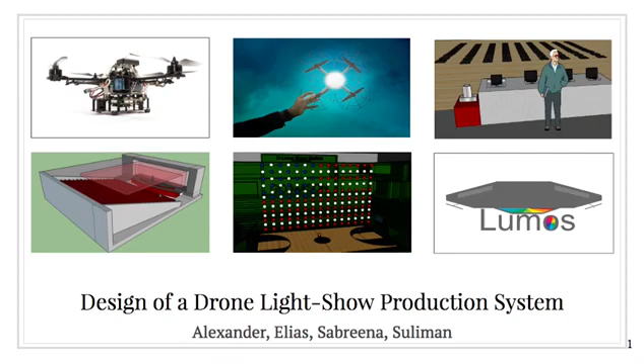A drone light show is a combination of several drones flying in unison, all while emitting different colored lights and flying in a variety of patterns in order to make a light show.

So to better understand a drone light show, we need to understand the industry behind it. In 2012, the entertainment industry had a $520.24 billion profit, representing about 29.2% of global revenue. That's huge. By the end of 2017, that number is projected to increase to about $655 billion, or about 29.4% of global revenue.

So this is a massive market, and we believe that adding variety to it would attract more demand to the industry. We also need to understand that there are different types of light shows and the context behind them. So we're focusing on fireworks and laser light shows.

For fireworks, in 2010 there was a consumer revenue of about $636 million, and that number increased to $755 million in 2015. Now, the trade-off here is that fireworks were the fourth largest cause of annual injuries in 2015, with 12,000 injuries.

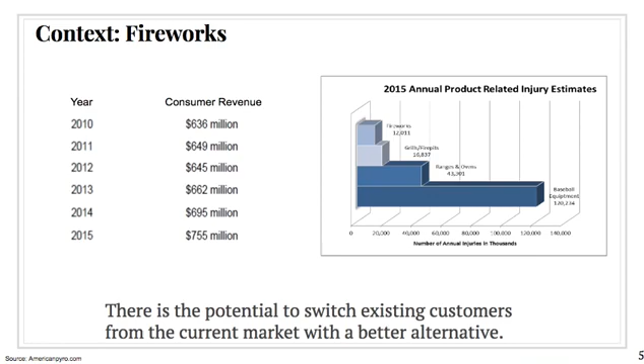We do believe there's potential to switch existing market customers to a better alternative. For our project, we specifically believe that outdoor projects become much more complicated due to a variety of hazards that come with nature. Storms, wind, and other unforeseen circumstances could hinder the safety of the project, so we're limiting our scope to indoors.

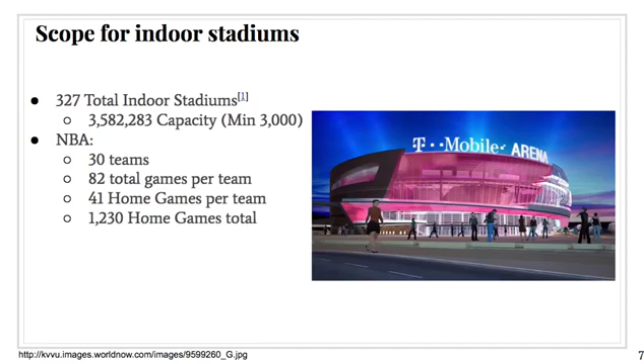For indoor stadiums, there's still a massive market - there are 327 total indoor stadiums, providing a massive seating capacity. If we look at the NBA, for instance, there's about 30 teams with about 41 home games per team, giving about 1,200 home games total. We'll go over this later, but that's a huge market to go into.

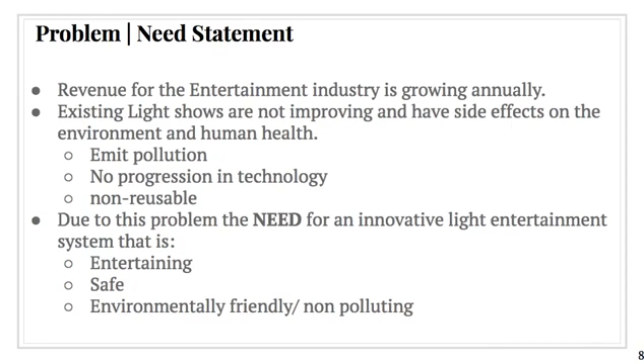For the problem need statement: the revenue for the entertainment industry is growing annually, but existing light shows are not improving - they emit pollution, they're not progressive in technology, and they're not reusable. Due to this problem, there's a need for a new light show system that's entertaining, safe, and environmentally friendly.

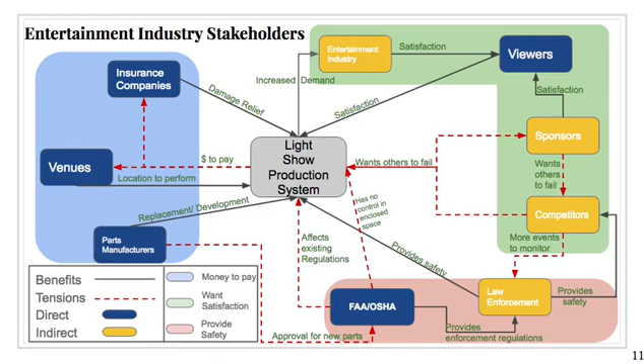For the stakeholders, we have 5 main direct stakeholders and 4 indirect stakeholders, representing the interaction between both. It's also important to note that no stakeholders are blocking our show from happening, regardless of the tensions shown, and that's really significant - it allows us to continue our project.

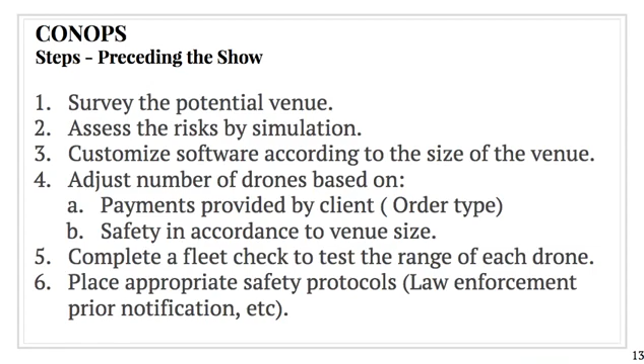Now onto the concept of operations. Preceding the show, the main focus will be venue assessment for risks and other parameters to enable customization of the show, including preliminary testing and ensuring the venue meets legal requirements. Those are our first main 6 steps.

On the day of the show, operations will focus on the preparation of drones and the entire system to ensure the performance runs smoothly. This includes setting up the communication system and having all the indoor requirements set as well.

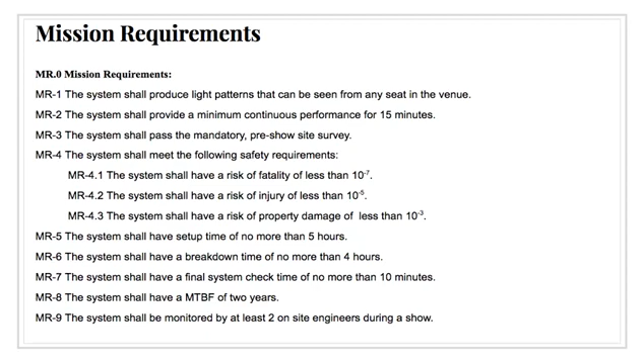Our mission requirements were created primarily with safety in mind. We also had a variety of different requirements such as simulation requirements, design requirements, and others to ensure that our system is fully functional and meets all the standards needed to make this happen.

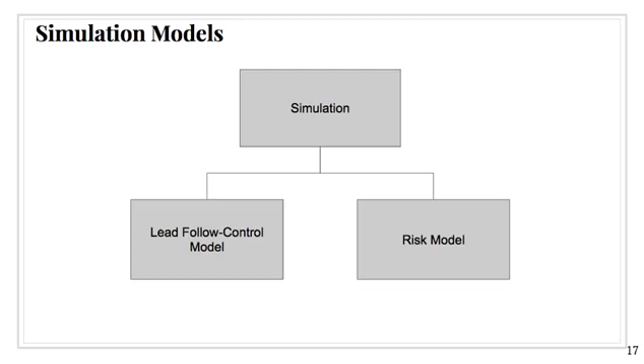One of the most important aspects of our project was the simulation to ensure safety. Our simulation models were divided into 2 main sections: the lead-follow control model and the risk model. Our lead model was developed to evaluate the relative trajectory of a lead-follow pair, and we used PID tuning in order to minimize any separation errors based on the target values.

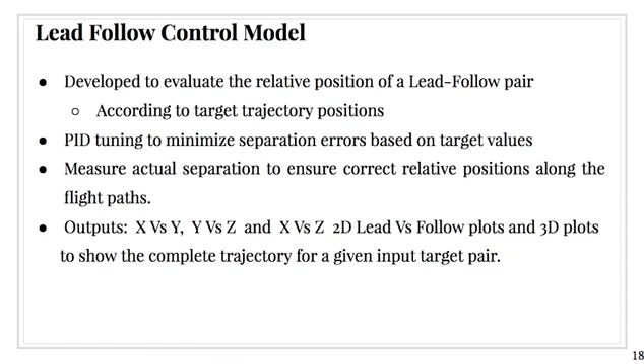We also measured actual separation to ensure the correct relative positions along with the flight paths, and this gave us a variety of outputs. This is basically the chart that shows our control process.

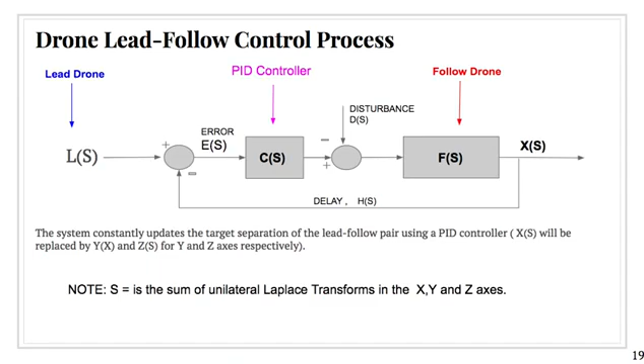As you can see, there's a lead input for the drones, which then leads us to the PID controller, and as an output we're given the follow drone. This has a small delay, but the system constantly updates the target separation, and as a result the PID varies.

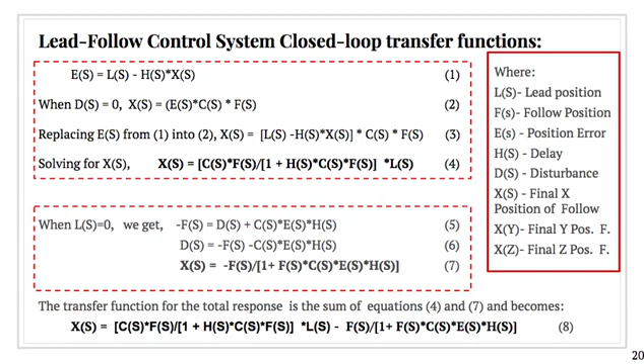The lead-follow transfer functions were derived in order to take into account any potential position error, delay, and disturbance for the system. The top box basically shows the final positions without disturbance, whereas the bottom includes disturbance.

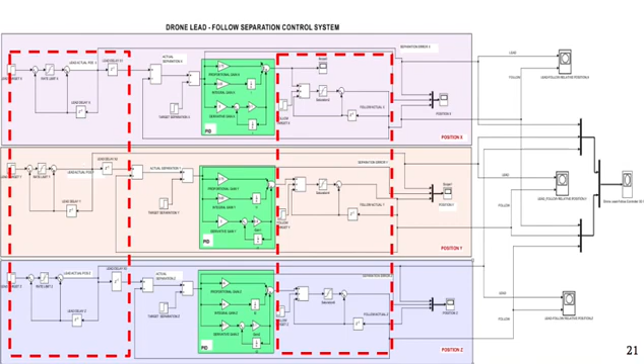As a result, we were given different scopes which provide different outputs to see any changes that we need to make for our system. We use system verification by simulation for the PID controller itself to test our model, and this was divided into the proportional, integral, and derivative controls.

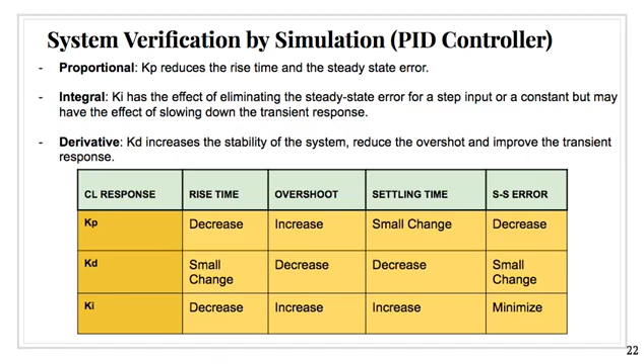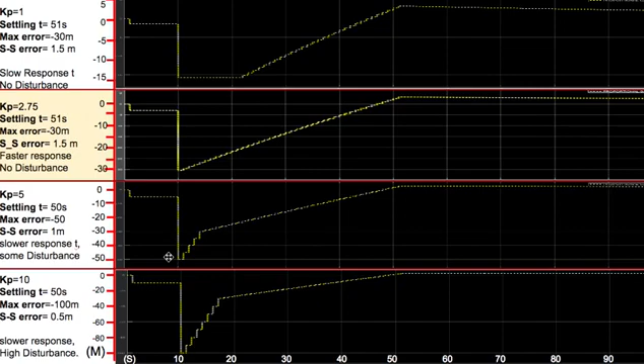You can see that primarily with this small increase right here, there is no delay, whereas KP of 1 has this immediate almost 10-second delay, where the system basically can do nothing. Now the bottom two values show disturbance in the step functions, as you can see right here.

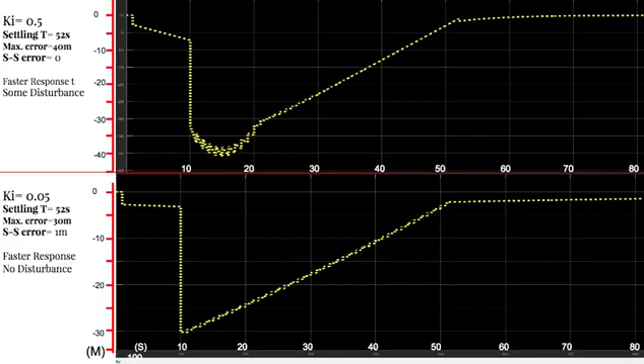KI was similar. We have two main charts, and you can see here as well that the disturbance is quite noticeable for a KI value of 0.5, whereas 0.05 immediately shoots up. This shows that there's a faster response, and that's why KI of 0.05 would be better.

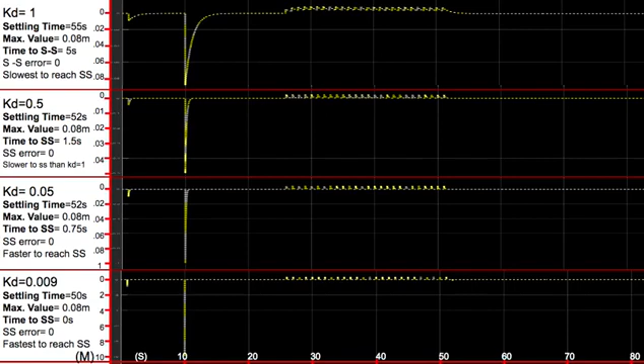Once again for KD, we can see the same thing: the smaller the value, the faster it would reach steady state, and the error is also 0 for steady state error.

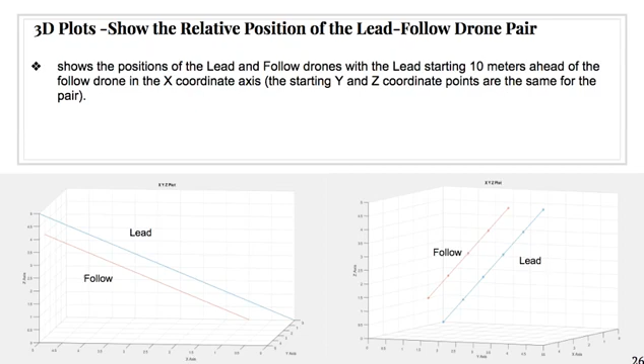Onto the risk model. The risk model is divided into two main sections. We first focus on the kinetic energy model, which focuses on the velocity and the surroundings of the drone itself, and we go into the fatality, injury, and property damage for drones.

Then the second risk model calculates the near mid-air collisions and the mid-air collisions for the drones, which also focuses on the drone itself but not the environment around it, and this also focuses on the drone velocities too.

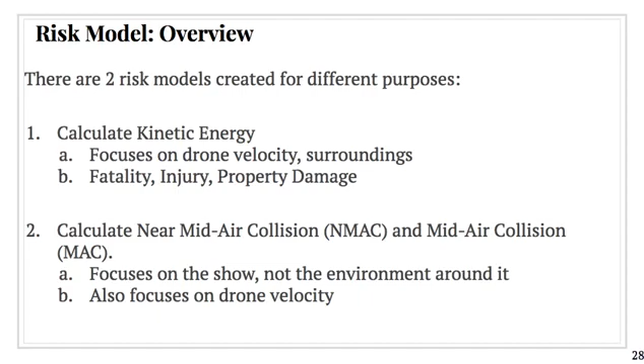This chart on the right basically shows the velocity to kinetic energy, and it's not specific to our system, but it is actually completely relevant. It's a study conducted by Monash University in 2013, and it shows us the acceptable velocity region.

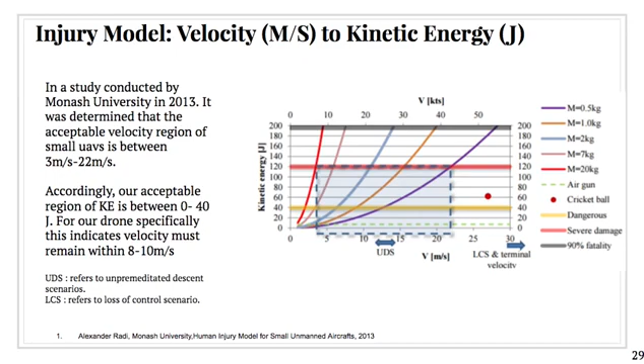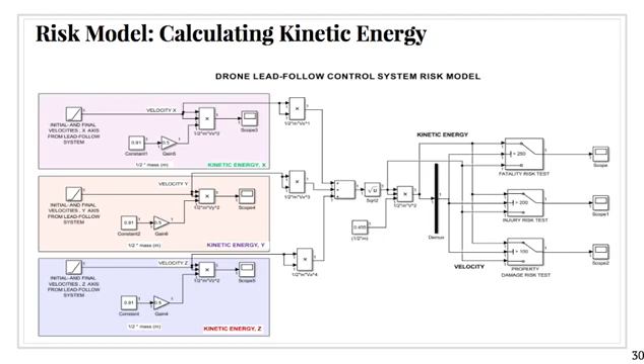So basically we were able to use our drone in our risk model to evaluate the specific fatality, injury, and property damage risks associated, and we can see that with slide 30, which is the risk model that we created. It basically uses the different inputs of the Asctec Hummingbird drone in order to see what outputs would happen, and see if the specific joule level would be high enough for a fatality to happen, an injury to happen, or any damage to property to occur.

Our output basically showed that for the Asctec Hummingbird, about 15 meters per second would be the max velocity to create a fatal injury risk.

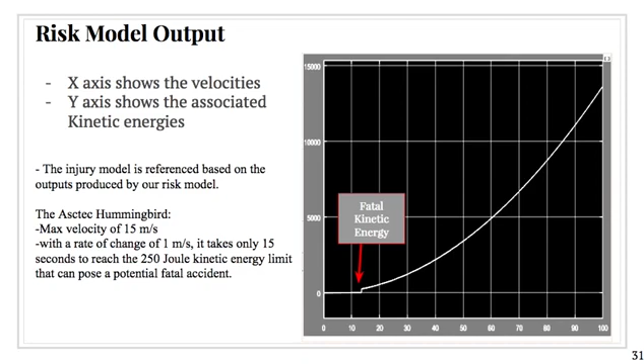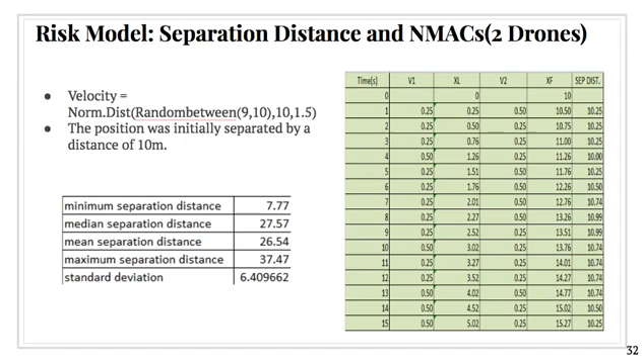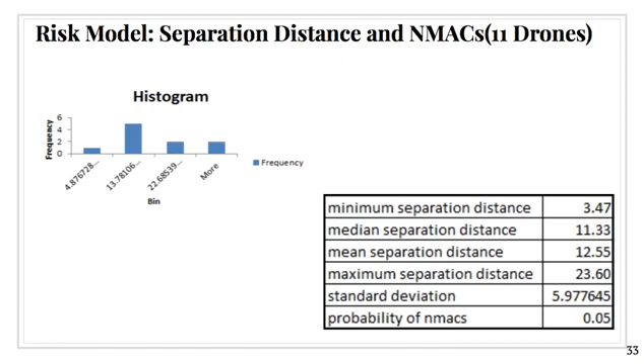Our mean separation distance here was about 12.55. We then lastly ran the risk model using 101 drones, and the mean separation distance remained around 13, which is very good.

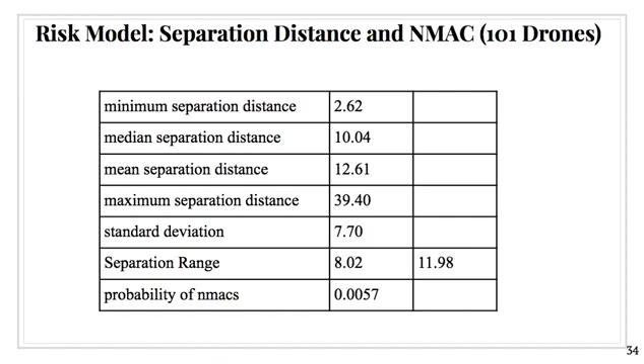Lastly, we had the business case, and the business case was very important for our project because we're in the entertainment industry. Without the business case, we'd have nothing.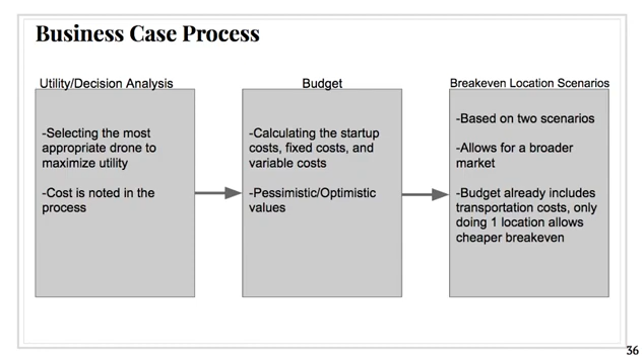The business case was divided into three main sections: the utility and decision analysis to pick the best drone, the budget, which is self-explanatory—calculating the startup costs, fixed costs, and variable costs—and lastly, the break-even location scenarios to show that our product has a broad market and anything is possible for different scenarios.

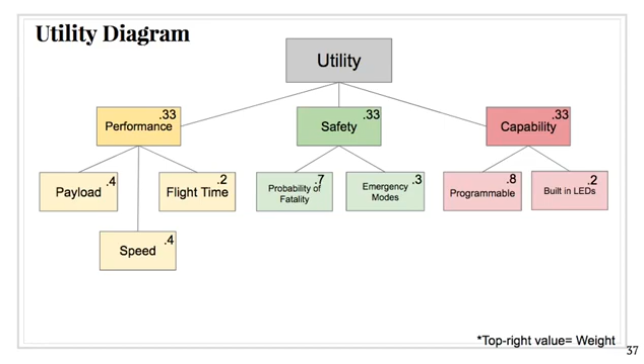Our utility was divided into three main partitions: performance, safety, and capability of the drone. These were all weighted equally and had several attributes associated with each. We were able to get different ratings for each drone, and as you can see, the Intel Shooting Star had the highest rating of 7.9, and next was the AscTec Hummingbird with 7.066.

Unfortunately, the Intel Shooting Star is not available in the current market—it's essentially a beta drone, so we wouldn't be able to use it.

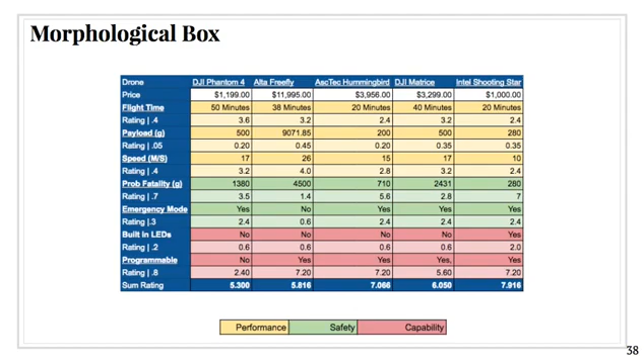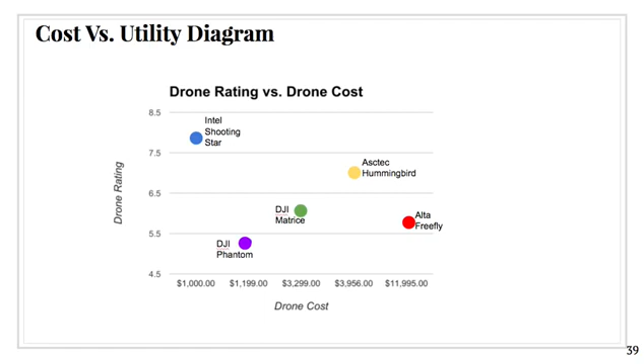But the AscTec Hummingbird is still a great drone, and that's evident in the cost versus utility diagram. The Intel Shooting Star is the highest, but the AscTec Hummingbird is a close second and is still a viable drone to use. Next, we have the total cost breakdown, divided into startup and recurring costs, with recurring split into fixed and variable costs.

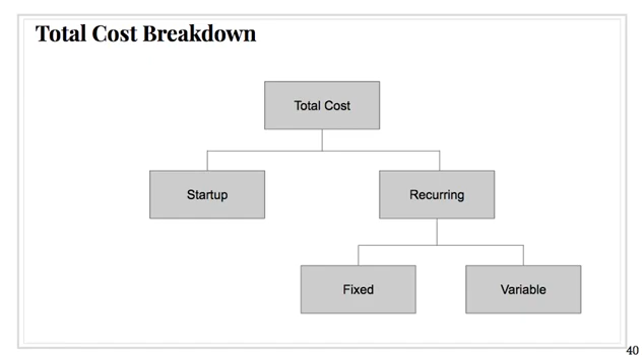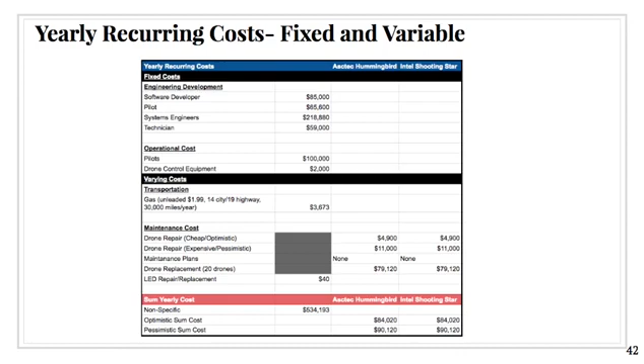The startup costs were divided into construction costs and drone transportation, ending up at about $500,000 for the AscTec Hummingbird. Next were the yearly recurring costs for fixed and variable prices, shown in the black boxes or lines, divided into optimistic and pessimistic values because for maintenance you never know what can happen—about $90,000 for the AscTec Hummingbird.

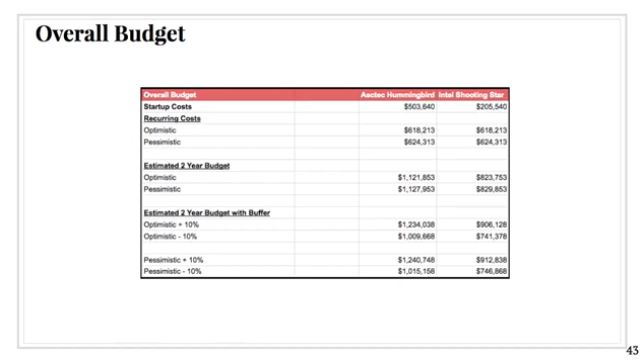That led us to our overall budget for 2 years. It would be about $1 million to $1.2 million, depending on how optimistic or pessimistic our values are.

We had two main scenarios to show how versatile our product is: Eagle Bank Arena, which had about a $40,000 fee, and the Center for Performing Arts, which had about a $9,000 fee.

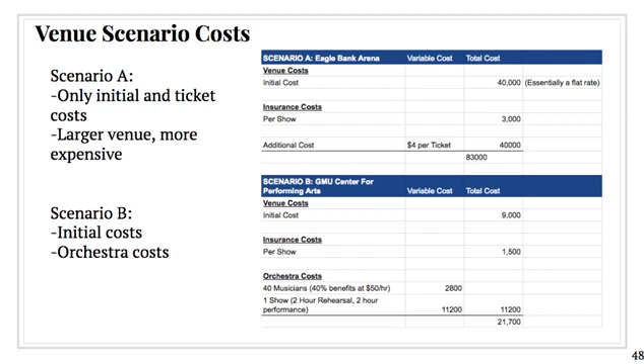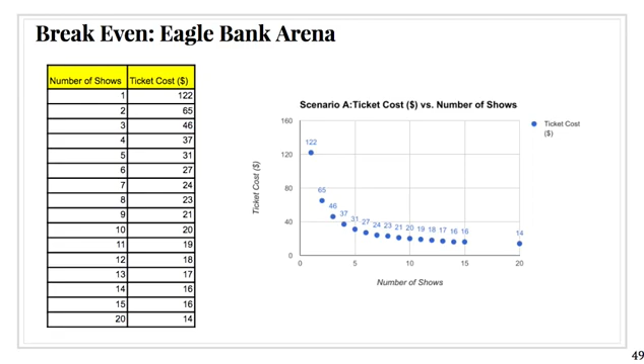This is shown in our venue scenario costs, which showed that Scenario A was a larger venue and more expensive, but Scenario B was much smaller. We can see in our break-even that Eagle Bank Arena was $122 for one show to break even, but as soon as we hit 20 shows, it's only $14, which we think is a very valuable cost.

Next is the Center for Performing Arts, which had a much higher cost because of a smaller capacity, but once we had 50 shows, it was only $23 a ticket.

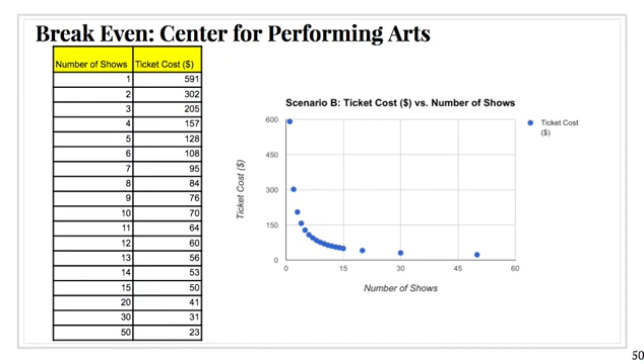Lastly, we talked about the NBA—there are 1,230 games, so if we had 10% of those games, it would be about 123 games. If we only had one added dollar to the tickets sold at an NBA game, we would have a profit of $800,000 for our show, and we think that's massive.